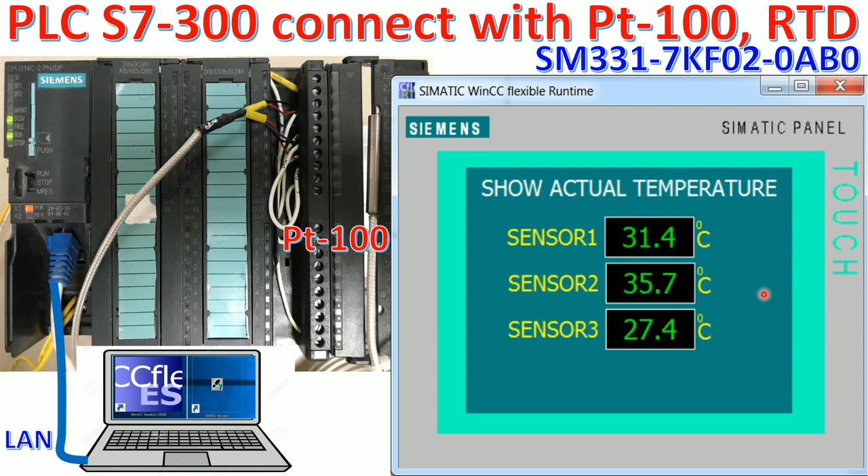Here is the previous video where we already learned how to connect three Pt-100 sensors to this module of the PLC. Today we will continue to connect one more TC, meaning Thermocouple, to channel number 4. For channel 1, 2 and 3 we already connected the Pt-100, so we will add more for TC to channel number 4, and then create the screen to show the actual temperature also.

So before going to our software, I would like to show and share how to wire the TC to the terminal of the PLC S7-300 module. Let's go.

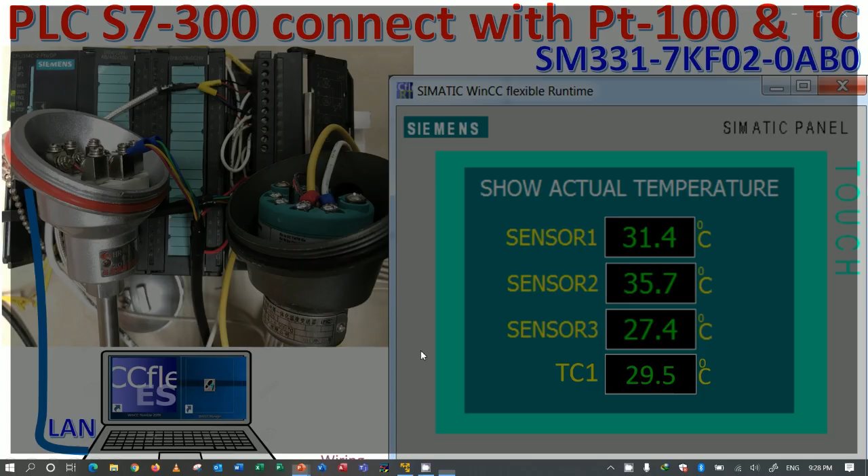For Pt-100 wiring, I already explained in the previous video, so in this section I just add one more for Thermocouple. We will use terminal 16 for positive and terminal 17 for negative. This is a millivolt signal detected from the Thermocouple and sent to the PLC. Here is the address PIW268 that we will use for configuration inside the software.

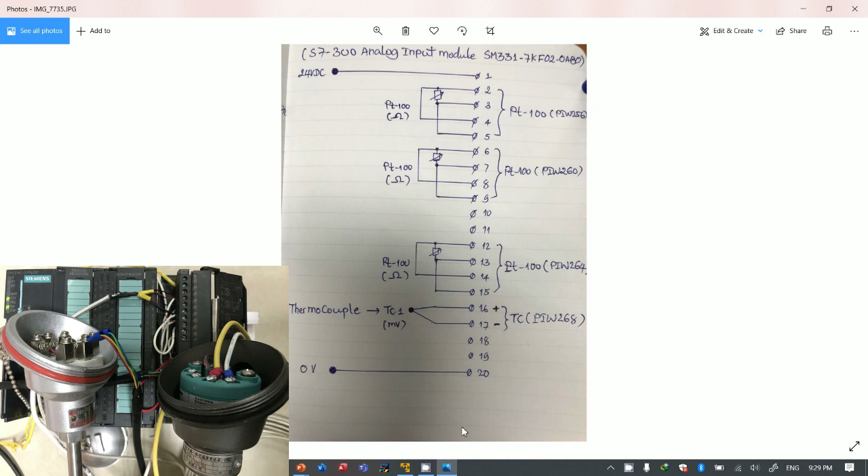So we need to wire first before we configure the software. Let's go to our software to create the block or configure the hardware. Let's open the existing project that we already learned in the previous video, the one using Pt-100. Let's open it, and first go to hardware and go to the module.

For address I will keep default, but for the input, since this is from the previous video, I will change input number 6 and 7, or channel number 4, to TC, and then I will use type K for connecting from the Thermocouple to the terminal of the PLC. So we just change it like this.

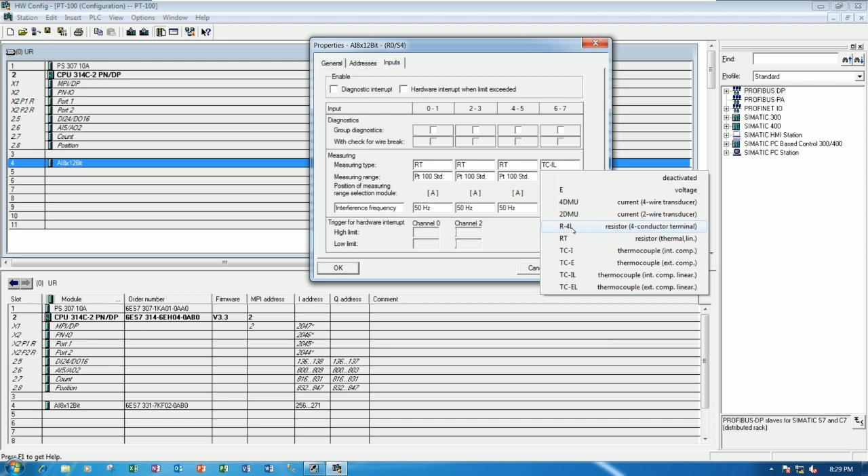Then click OK, and we can save and download to the PLC. Software configuration is very important. If we select not correctly, we cannot get the raw data from the Thermocouple, so it's very important.

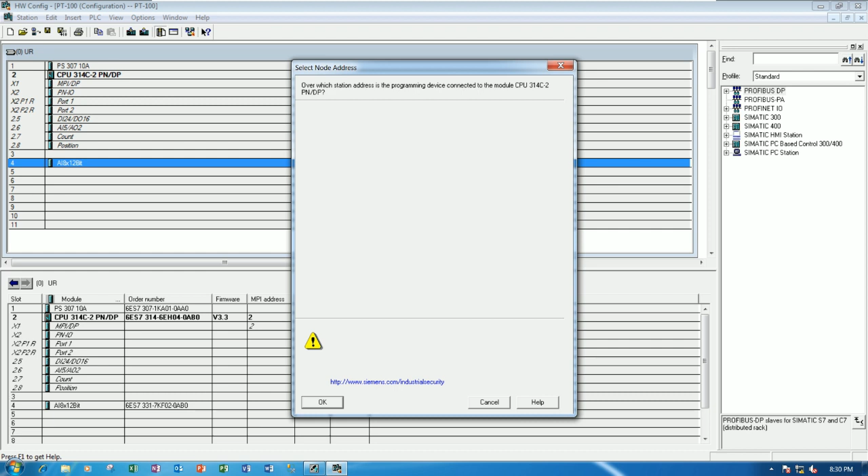So wait a moment for connecting between our PC and the PLC. Right now it detects the CPU, so we can download. Download successful. Now let's go to our block.

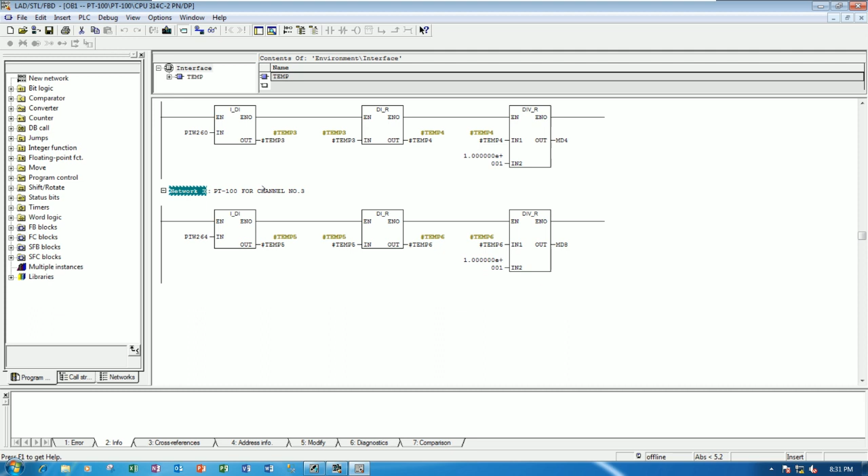Open the OB1 that we already learned in the previous video. In this one we can copy from the text. I will insert a new network - this was for Pt-100, but now I will change it to TC, thermocouple, for channel number 4.

Basically we can use convert from integer to double integer. So integer to DI - this one should be PIW268, because in the hardware configuration we already set this address.

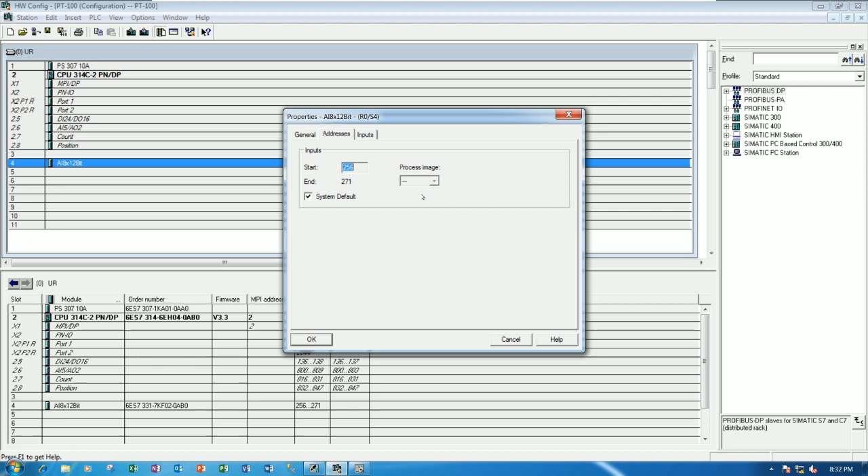Then I will insert one variable called temp - we can use temp7. So temp7 is integer to double integer, right? We write DINT for double integer, and here is temp7.

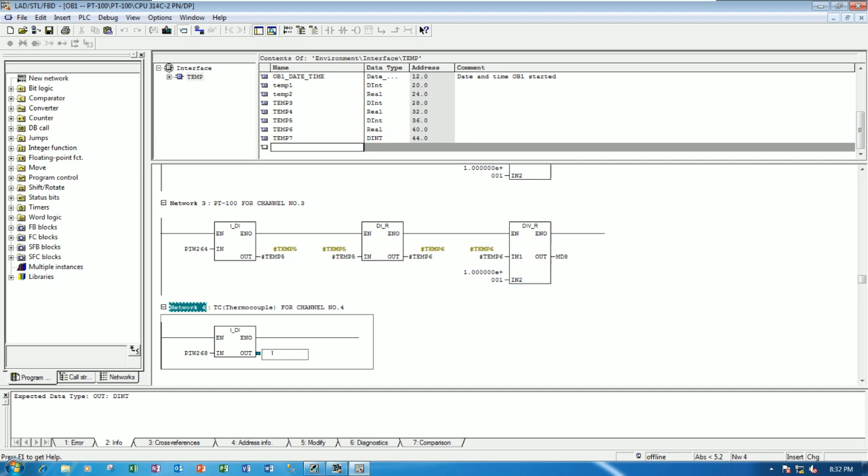And I will use double integer to real - can copy from here, paste, and then I will choose one more for temp8, and it will be real for data type. So temp8.

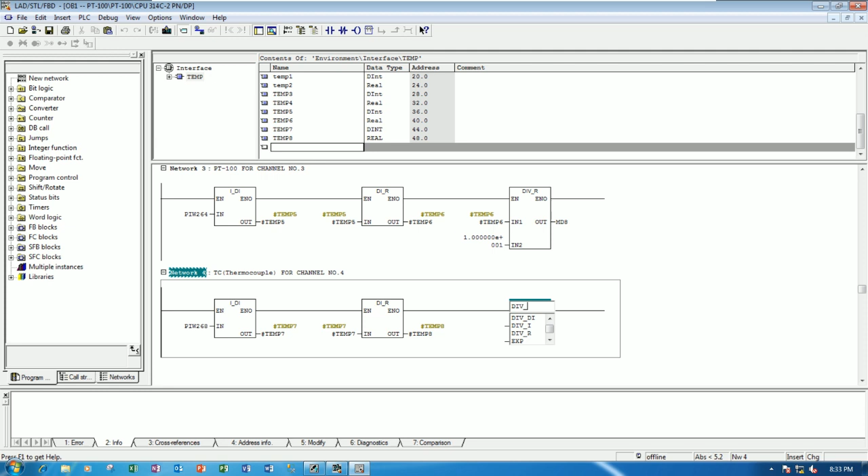And we will divide by 10, right? So divide real - temp8 divided by 10.0, and MD12, right?

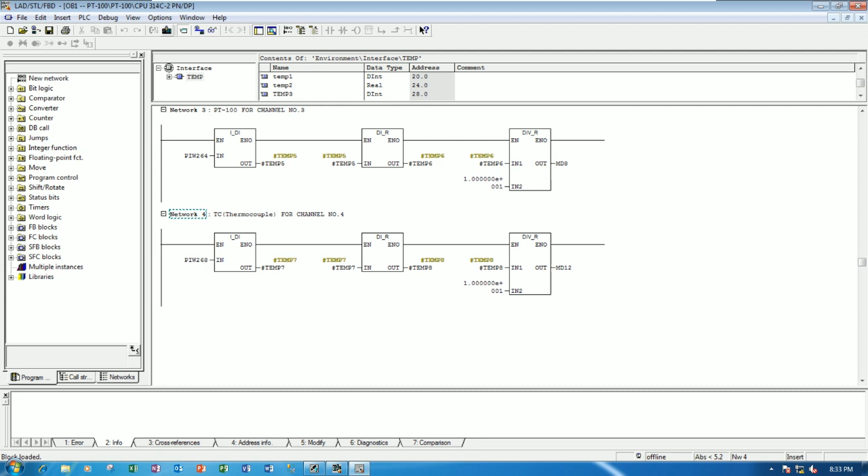We can save the project and then download to the PLC, and go online. Right now it shows around 26 degrees Celsius for this sensor.

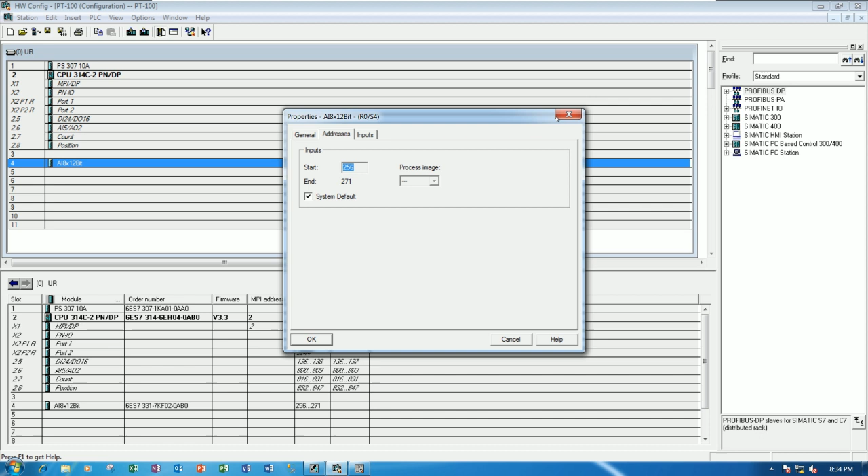So we can go to WinCC Flexible to create more screens to show the actual value. Let's open the existing project for WinCC Flexible - the project is Pt-100.

Then we can go to add the new tag - let's go to the tags, create the new tag. This one for TC1, right? And it is real, automatically created for MD12, the same as in the PLC we already created. So this one is Thermocouple 1.

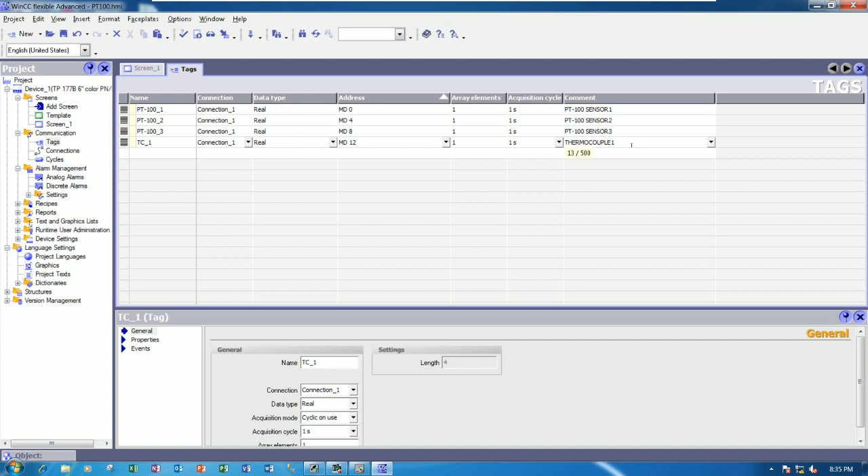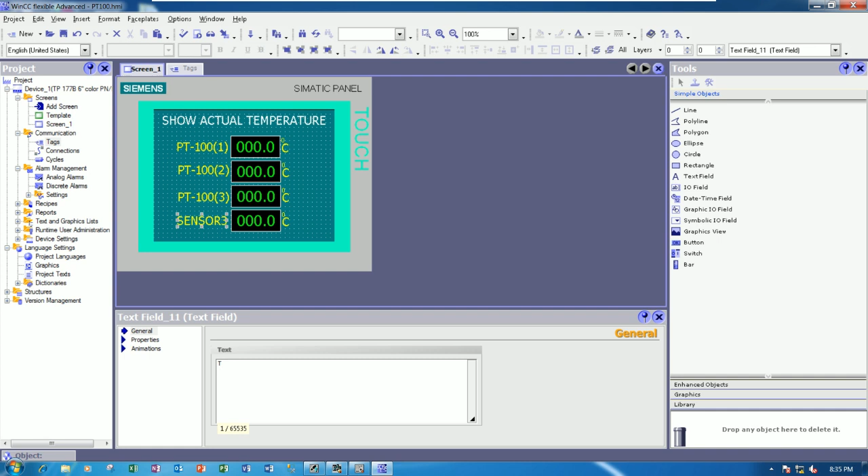So here we can copy from here, drag and drop, and then we can change this one to PT-100(1). This one should be PT-100(2), from the previous video, right? And this one should be PT-100(3), and the last one for TC, that we already created, TC1.

I will adjust it to be like this. So we need to configure the tag - yes, TC, the tag we already just created. We can save, and then simulate.

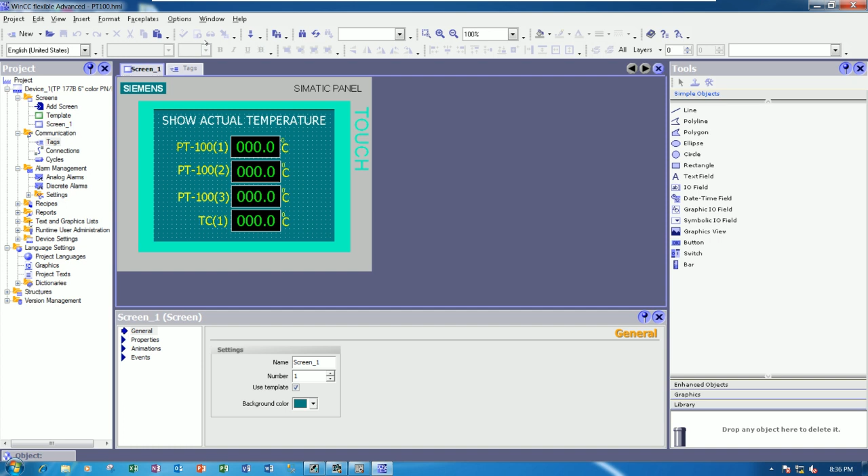Let's see here - right now it shows around 25.4 for TC. So it's very easy to create the block for the Pt-100 and TC.

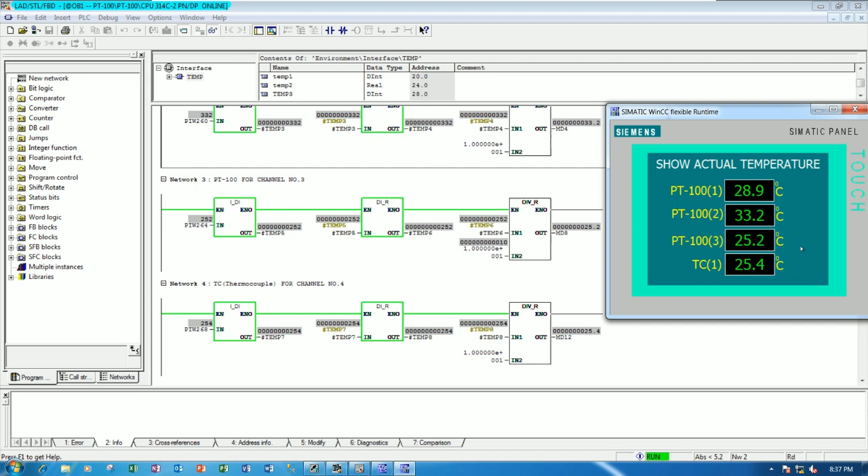We just convert from integer to real and then divide by 10, so we can get the actual temperature from those sensors.

And in this case, if we take out one cable - I mean when we take out one core of the thermocouple - it will show maximum.